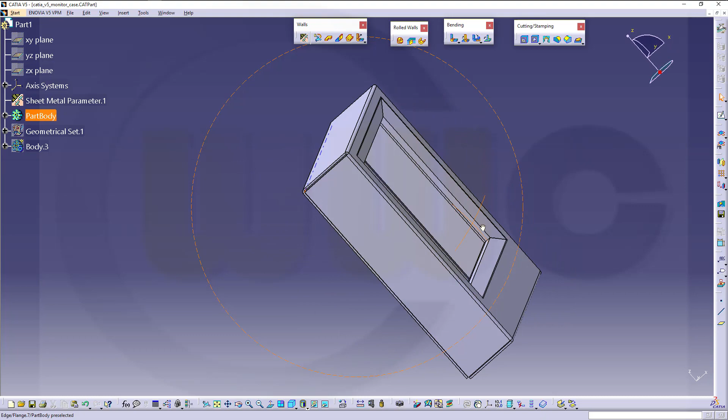I want to do that monitor case sheet metal exercise now in Catia. And I used in Catia a punch as well. So let's have fun with Catia V5.

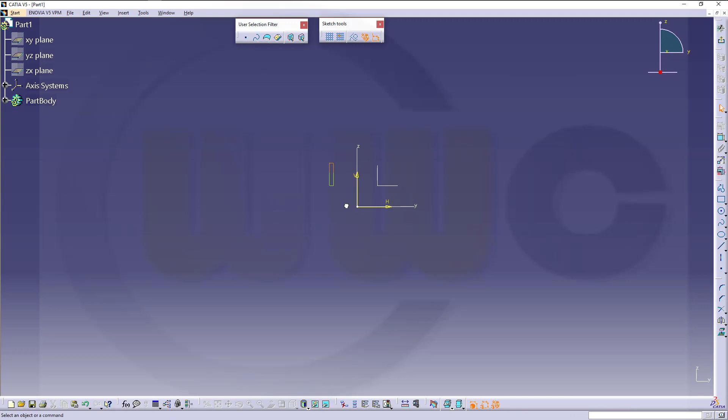First I want to model my monitor case as solid because I will need it to create my punch. So let's go for a sketch on the YZ plane. Hide these. I need a rectangle and I don't need those parallel constraints, so I will delete them.

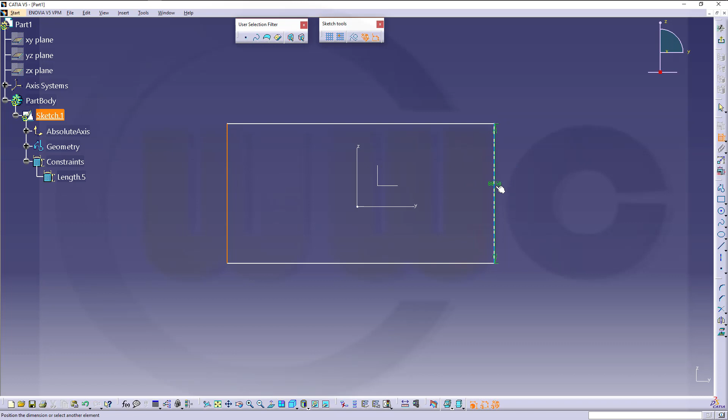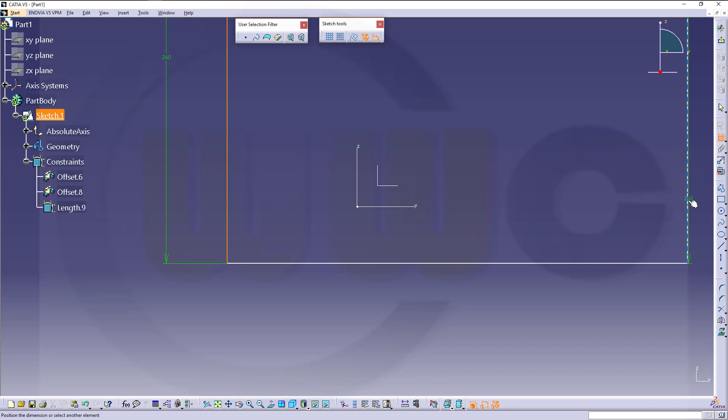Now let's add some dimensions. This should be 300. That distance should be 260. Those two should be symmetric to the z-axis and these should be coincident.

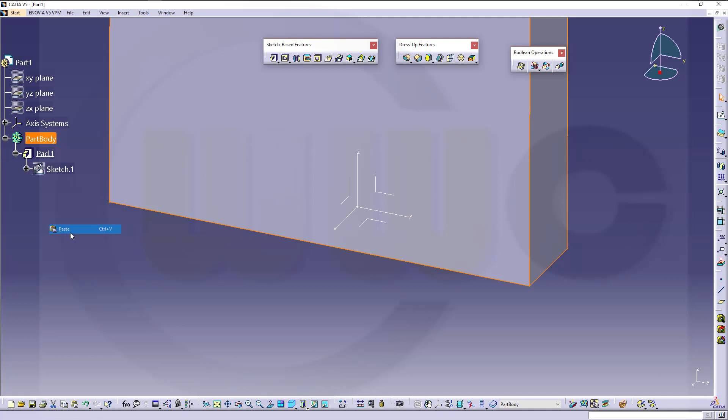Leave that sketch. Let's make an extrude or a pad which is 60 in that direction. I will need a similar sketch, so I will copy it, copy, paste. Let's edit this one. So this dimension should be 230. That dimension should be 170.

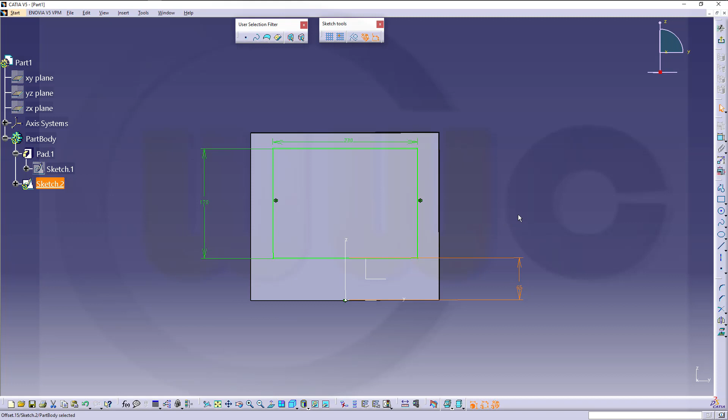And I need to remove that constraint and align this with that's 65. Leave that sketch. Now let's make a pocket. Reverse direction. 60 millimeters is okay, but I want to start with an offset of minus 45 millimeter.

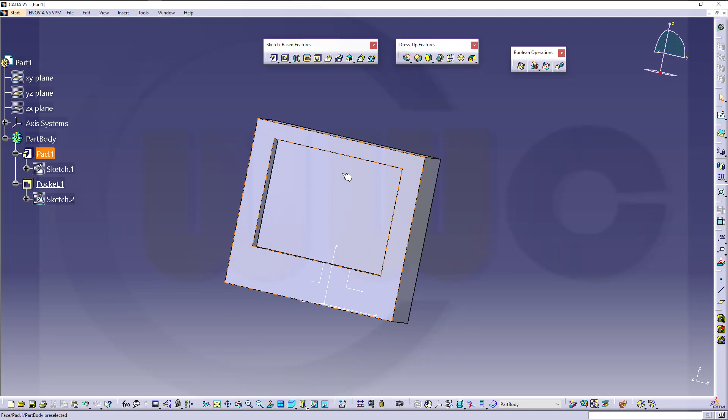Now I need a chamfer. 15 millimeter long and the angle should be 30 degrees. Let's select those, not the face, but edge, edge, edge, and edge. Preview, looks good, confirm.

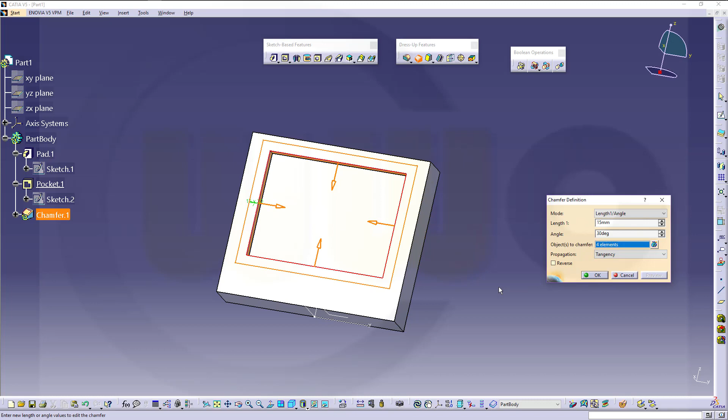In order to do my punch, I will need two more bodies. So let's insert body, and I want to exchange that body with this body. So let's go to body 4 object and change part body and confirm. So now the part body is empty and this will be the solid case and this will become my punch.

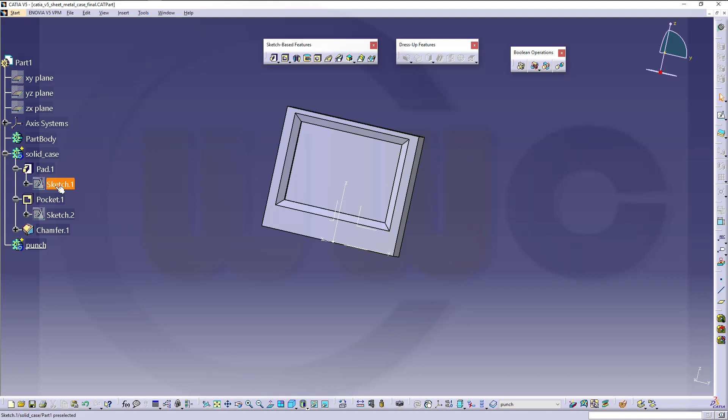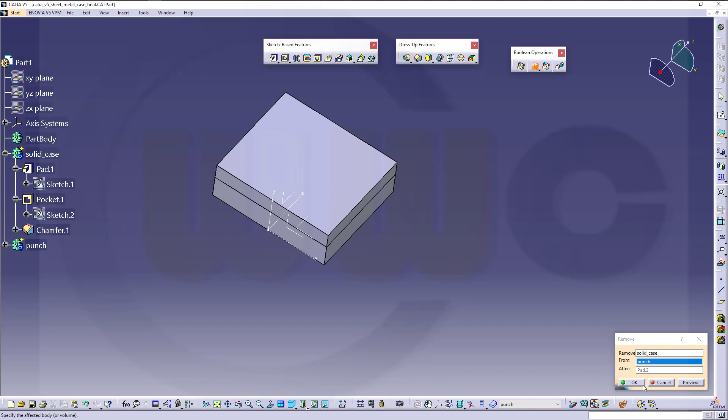I want to reuse that sketch, so go for a sketch, make another pad and make it not 60 but let's say 100. Now I want to remove this body from that one, so go for remove this body from the punch body and confirm, and I got a nice little stamp.

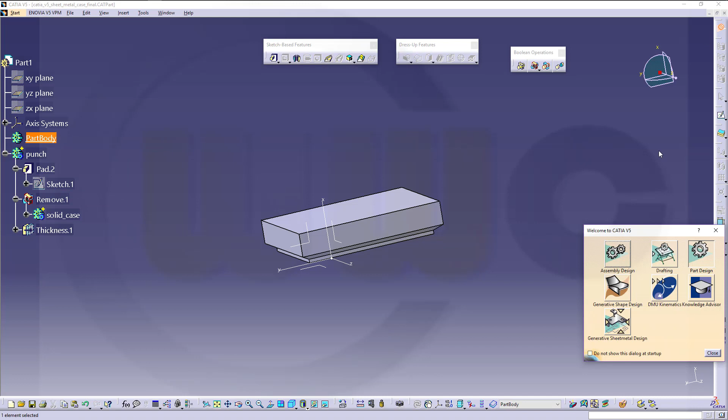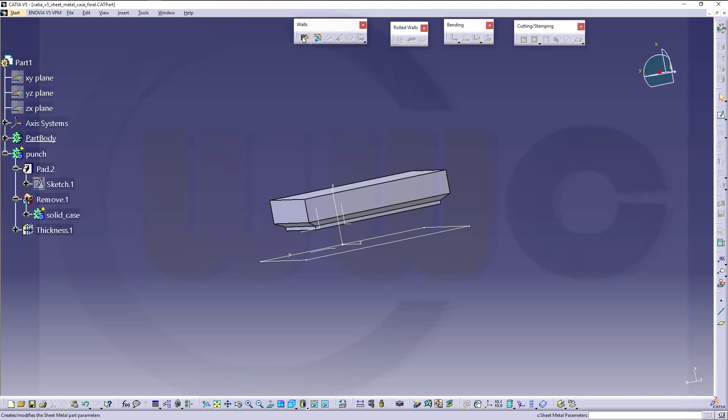Now I have to switch to the sheet metal. Let's activate that part body, switch to generative sheet metal design, and I can reuse that sketch once more, or I could just copy it. So copy and paste it to the part body. Now I can do a wall, but before I have to at least confirm my sheet metal parameters. That's 2 mm thickness and 2 mm default bend radius. Confirm.

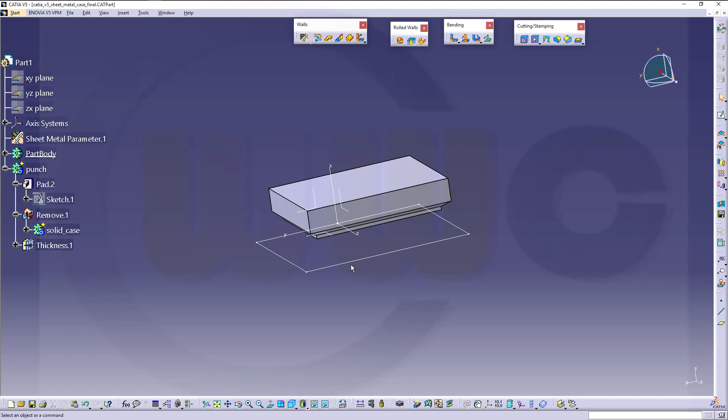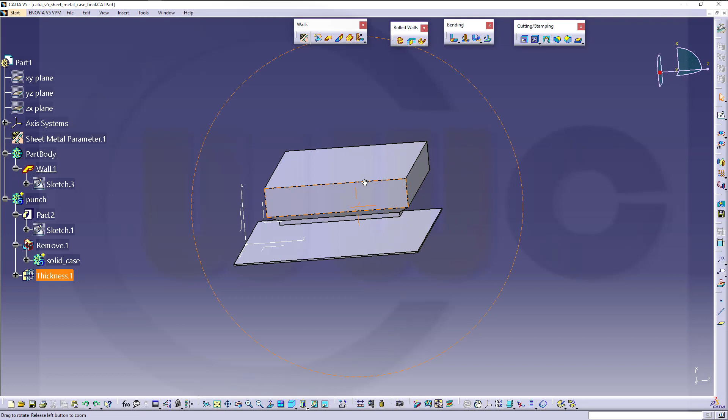I start with the base here. Why? Because I want to do the punch on a flange. So let's go for my base wall right here, and material should be maybe to the side. And okay, now let's add some flanges. So I need a flange on that side here.

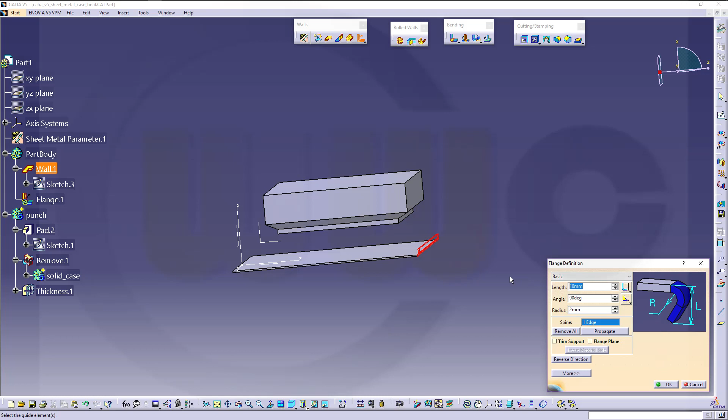Okay, go for a flange, select it here, and let's take a look from where it's measured. If I go for the outside length, I would have to go for 58, so I will use this one. That should be 58. And then another flange.

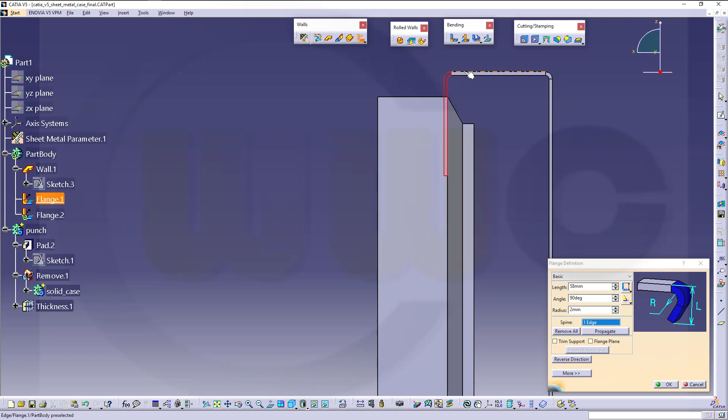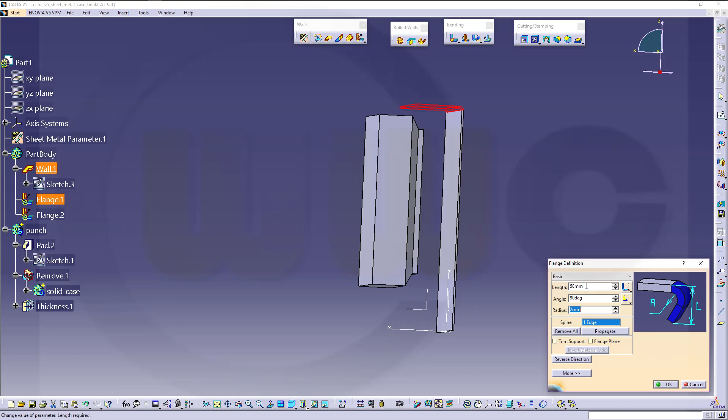Come on, this edge. And seems I have to change this one by 2 mm. So this could be again outside length up to there should be 260. And let's edit this one, go for 56. Yeah, that's it.

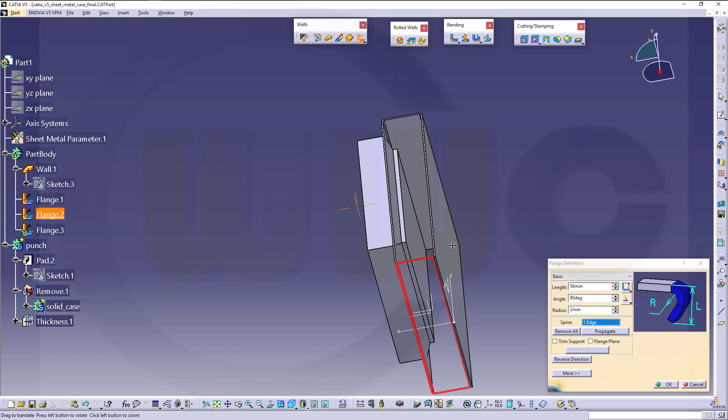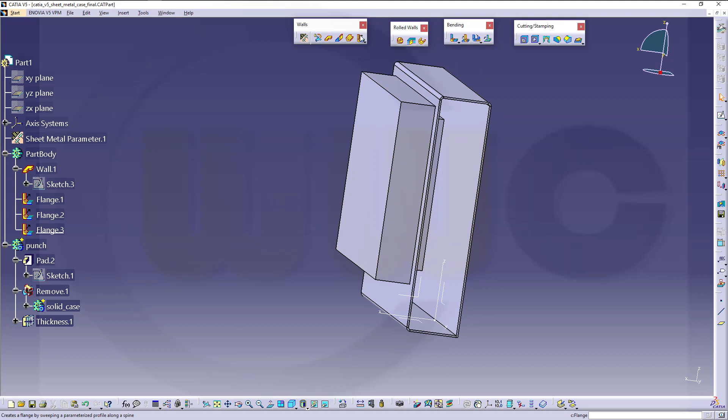Now maybe another flange here on that edge. Or 60. Okay, and then I need a flange here or here, so I would go for the front side, go for a flange on this edge. 58, that's okay, and another one on the other side. This one, and confirm.

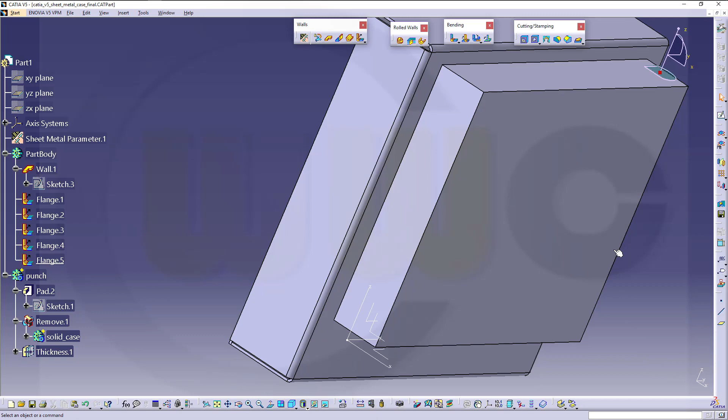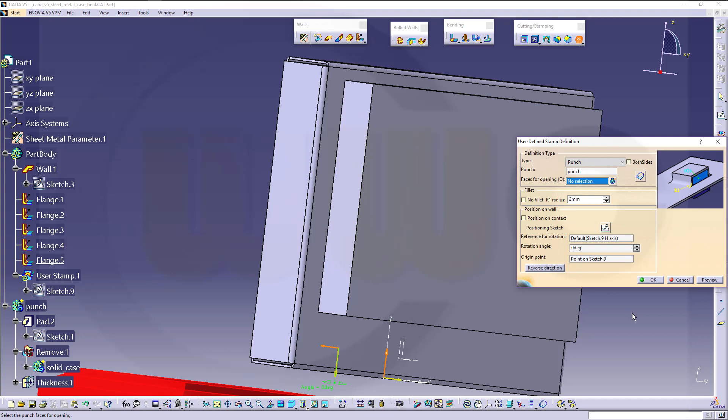So let's do our punch. The punch would be here, cutting and stamping, and the last one on the right side, user stamp. I want to use a punch. I need to select the face I want to punch, this one. Select the body of the punch, that's this one. And you could do it with fillets or without fillets.

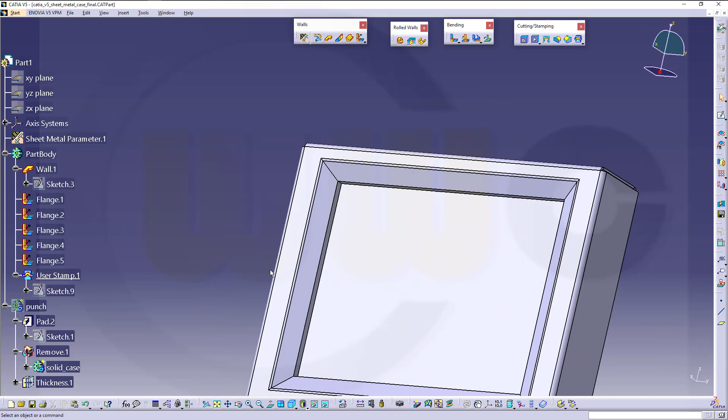And it's not positioned on the right spot, so I will go for position on contact. Now it's in the right spot, and let's confirm. So here are those fillets. You could do it without those fillets. Then I need a cutout. So let's do it very quick and dirty.

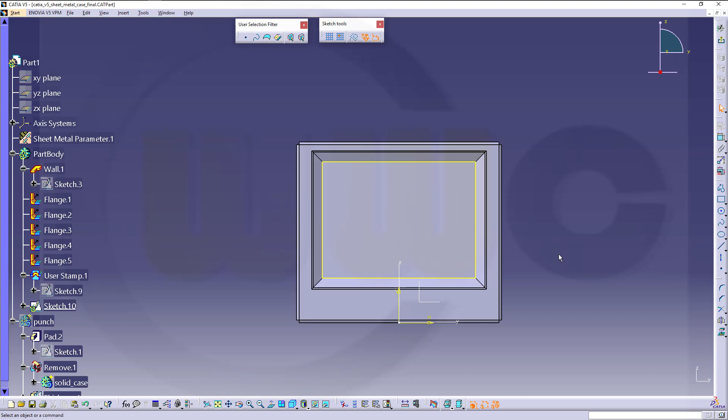I use my sketch on that face right here, and I want to project that face. So I got a rectangle with the right dimensions. Let's leave that sketch and let's go for a cutout. Cutout with that sketch right here.